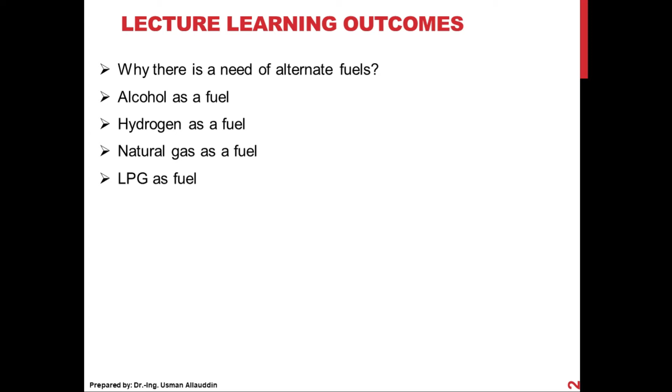In today's lecture, I am going to cover chapter number 7 of book Ganesan. The title of chapter number 7 is Alternate Fuels. These are the learning outcomes of today's lecture. So I will start the lecture with the question that why there is a need of alternate fuels. Then we will study the advantages and disadvantages of alcohol as an alternate fuel. Then we will study the same points, that is the advantages and disadvantages for hydrogen, natural gas and LPG as alternate fuels. So these are the learning outcomes of today's lecture.

So first we will discuss that why there is a need of alternate fuels. There could be several reasons. The first reason is that an enormous increase in number of vehicles have started dictating the demand for fuel. So you have experienced and you have observed that with the passage of time, with the increase of population, the number of automobiles which are based on the internal combustion engines have been increased tremendously.

So with that, there is a fear that gasoline and diesel will become scarce and most costly in the near future. So with this fear, people have started thinking for the alternate fuel. So they think that when the gasoline and diesel reservoirs will be finished, we should have some alternate fuels. So this is the number one motivation to go for the alternate fuels.

Then currently, because of the high cost of petroleum based products, some developing countries are trying to use alternate fuels for their vehicles, like Germany, USA, European countries, and the other countries. They have started using like alcohol or biofuels, electricity produced from the solar energy. So they are trying to use these alternate fuels.

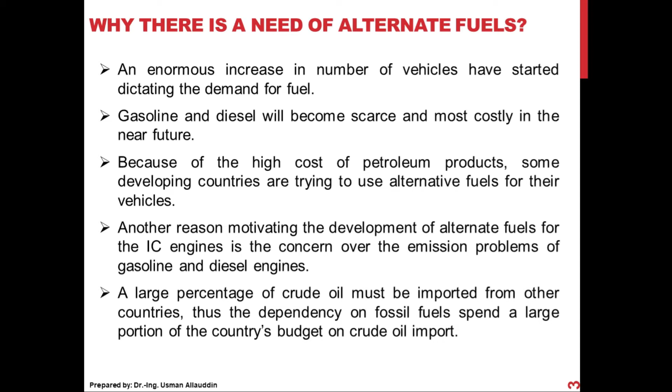Let's first discuss liquid alternate fuels. In the liquid alternate fuels, the famous option is the alcohol. So alcohols are an attractive alternate fuels because they can be obtained from both natural and manufactured sources. So alcohol based fuels can be obtained from natural resources like plants and the other living organisms, and then we can also manufacture them artificially in the labs by using chemical reactions. The most promising alcohols are methanol and ethanol, which are commonly used in many countries.

So let's discuss a few advantages of alcohol. These advantages are very simple to understand. So let's go through them one by one. So first advantage is that alcohol can be obtained through natural and manufactured resources. Alcohol has high octane number, like it has octane number greater than 100, while petrol has, I think, an octane number of around 90 plus, so this is a very big advantage,

so that with the octane number greater than 100 we can operate the alcohol based engine at compression ratios much higher than the gasoline based engine, and the engine performance at high compression ratio means higher efficiency, higher power output. Point number three, less overall emissions compared to gasoline based engines. So if you are using alcohol as a fuel, then the engine will emit less emissions.

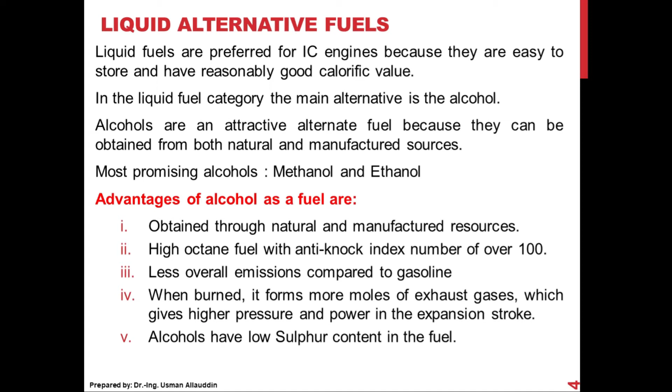When burned, it forms more moles of exhaust gases, which gives higher pressure and power in the expansion stroke. So it produces more number of moles of the exhaust gases, and if we have more exhaust gases, it means more pressure will be exerted on the piston, and that force will be transmitted to the crankshaft through the connecting rod, and the power output will be greater in the alcohol based engines. Alcohol has low sulfur content, so the sulfur based emissions will also be reduced when we use alcohol based engines.

Then there are some disadvantages of alcohol-based engines as well. Its first disadvantage is that alcohol has a low energy content, or in other words the calorific value of the fuel is almost half. So what does it mean? It means that if we want to get the same energy input to the engine as we get from gasoline, then we need to burn twice the quantity of alcohol as we are burning with gasoline.

So we need to increase the fuel tank size. The fuel tank size should be twice the fuel tank size of the gasoline-based engine. For example, if you are consuming 1 liter of gasoline, then you need to consume 2 liters of alcohol, because the calorific value of alcohol is half of the calorific value of gasoline.

Then disadvantage number two: combustion of alcohol produces more aldehydes. So if as much alcohol fuel was consumed as gasoline, then aldehyde emissions would be a serious exhaust pollution problem. So if we replace all the gasoline-based engines with alcohol-based engines, and we consume as much as the gasoline being consumed currently, then aldehyde emissions will become so much that it will cause a serious problem.

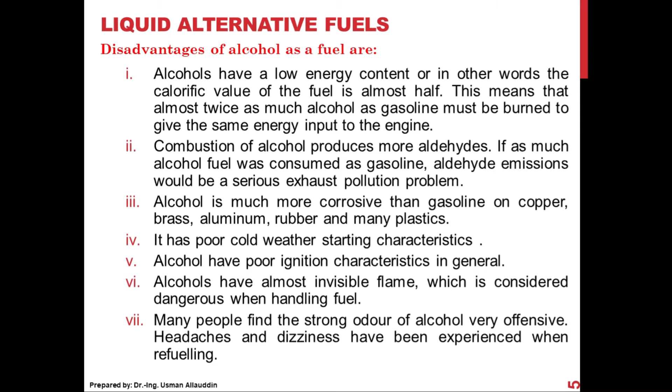Many people find the strong odor of alcohol very offensive. If you have experience, people find the gasoline or petrol odor very attractive, but alcohol has a very pungent odor, so people find it very offensive. And headache and dizziness have been experienced when refueling. So when you are refueling alcohol, its very offensive odor will cause headache problems.

Okay, now let's discuss hydrogen as an alternate fuel. The advantage of hydrogen as a fuel is that engine emissions will be reduced considerably. Good fuel availability: hydrogen is abundantly available because there are many methods to produce hydrogen. You have also studied in chemistry that there are chemical reactions where hydrogen is produced as a byproduct. So hydrogen is abundantly available, and its availability is not an issue.

Suppose it leaks from the fuel tank or from the engine; its leakage will not cause any problem to the environment, because we also have hydrogen gas in the environment. So if it goes into the environment, it will not cause pollution. High energy content per volume when stored as a liquid: when it is stored as a liquid, its energy content will be higher compared to gasoline. Now let's discuss some disadvantages of hydrogen as a fuel.

Requirement of heavy and bulky fuel storage. As I discussed in the last lecture, hydrogen is a gaseous fuel and gases occupy a large volume. So when you want to store hydrogen as a fuel in your vehicle, you need a very big, bulky and heavy cylinder. It will increase the overall weight of the vehicle, and in order to carry the additional weight of the heavy bulky storage tank, you need to spend extra engine power to cover that weight.

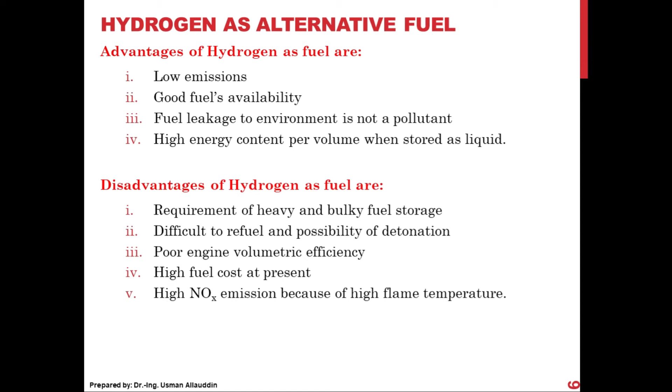High fuel cost at present, because right now hydrogen fuel is not produced commercially. So that is why hydrogen cost is relatively higher. Secondly, because in hydrogen there is a high energy content per volume, its flame temperature will be higher, and when the flame temperature is higher, NOx emissions will be increased, because the NOx emissions are dependent on the flame temperature. Higher the flame temperature, higher will be the NOx emission. So when you are using hydrogen, overall emissions will be low, but NOx emissions will be higher.

Now let's discuss natural gas as an alternate fuel. What is natural gas? Natural gas is a mixture of methane. We normally have 60 to 95% methane in the natural gas, and there are small amounts of other hydrocarbon fuels. So normally natural gas is also called methane gas. An advantage of natural gas is that its octane number is 110, which is good for SI engines. That is, its resistance to knocking is higher than gasoline, and we can operate the CNG based engine at much higher values of compression ratio.

That is why you have seen that in Pakistan, many owners of cars, buses, trucks, they are using CNG as a fuel, and when you talk to them, they say that when they run their engine on CNG, its performance is better. So now you can technically answer that, because the octane number of CNG is 110, and it is much greater than the octane number of gasoline or petrol. So that is the reason that when you are using CNG as a fuel, you can operate your engine at a much higher compression ratio, and higher compression ratio means higher efficiency and higher power output.

Low engine emissions: methane is considered the cleanest fuel, and when you burn methane as a fuel, engine emissions are the lowest. Fuel is fairly abundant worldwide. It can also be made from coal, but the process of making it is costly. So these are some advantages of natural gas.

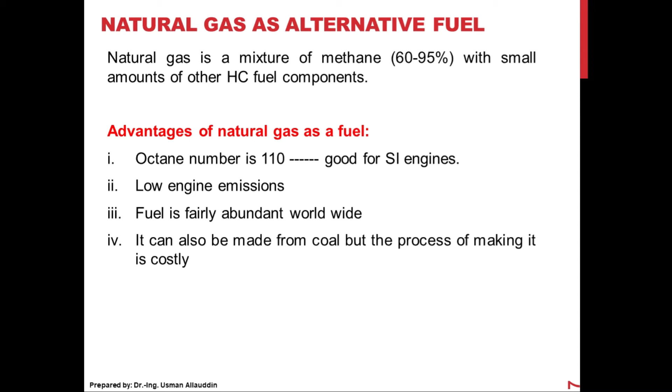Now let's discuss some disadvantages of natural gas. As I discussed with hydrogen, when you are using natural gas as a fuel, we need to have a large pressurized storage tank. Those who have used CNG based cars, they have a white color cylinder at the back in the dickey. These are the specialized high pressure storage tanks where the compressed natural gas is stored. Refueling of CNG is a slow process, and low energy density results in low engine performance. Because it's a gaseous fuel, that is why its energy density is low.

Low engine volumetric efficiency, because it is a gaseous fuel. Again, I have told you that when you are using a gaseous fuel, it is very difficult to take in oxygen, because the gaseous fuel will occupy space and less oxygen will go into the cylinder as compared to liquid fuels. So its volumetric efficiency will be low. So in order to avoid the storage and handling problem, natural gas is stored at a high pressure. Then it is called compressed natural gas, and compressed natural gas is stored at 16 to 25 bar pressure.

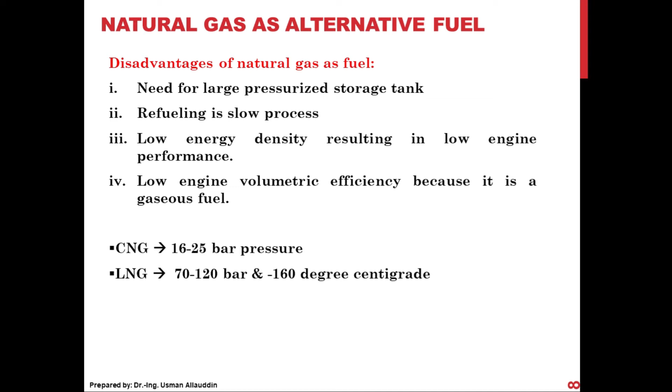And when you compress at much higher pressure, like 70 to 120 bar, natural gas will be liquefied, and during the phase change process its temperature becomes around minus 160 degrees Celsius. So CNG is at 16 to 25 bar, and LNG, liquefied natural gas, is at around 70 to 120 bar.

The natural gas, as I have told you, can be compressed, and then it is called compressed natural gas. The CNG fuel feed system is similar to the LPG fuel feed system. CNG conversion kits are used to convert petrol driven cars into CNG driven cars. So it's a common observation that when you want to run the petrol based engine on CNG, you actually need a special kit, and that special kit contains auxiliary parts like the converter, mixer, and the other essential parts required for the conversion.

Like I have told you, CNG is compressed natural gas, and compressed natural gas is stored at 16 to 25 bar in order to avoid the storage problem. But when you provide the natural gas to the engine, you release that pressure. So there is a part called converter. Converter is a part through which, when the CNG passes, it reduces its pressure. So when pressure is reduced, the compressed natural gas comes back into the gaseous form, and then it goes to the mixer where it is mixed with air, and the air fuel mixture is prepared, and then this air fuel mixture is supplied to the combustion chamber, and the combustion takes place.

This table shows the emission levels and a comparison between CNG driven vehicles and the petrol driven vehicles, and you can see that these are the petrol based engine. So when you use the petrol, the carbon monoxide emission is 0.92 gram per kilometer, whereas when you use the CNG, this value drops to 0.05 gram per kilometer, which is considerably low.

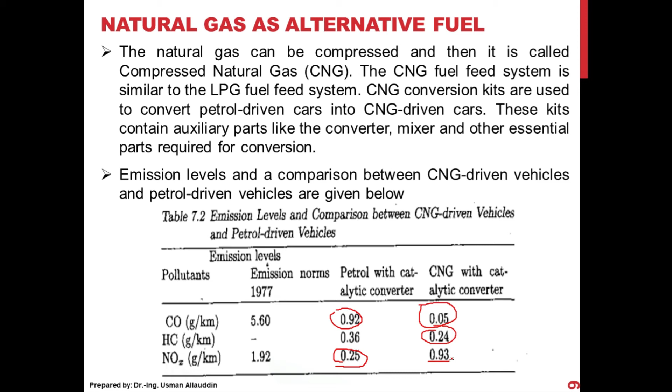So now let's discuss LPG, liquefied petroleum gas. What is petroleum gas? Petroleum gas is actually propane. Propane and butane are also called petroleum gas, or sometimes a mixture of propane and butane is called petroleum gas. And it is stored at high pressure. So in order to avoid the storage and handling problem, petroleum gas is stored at much higher pressure, so you compress it, so it comes into the liquid phase, and that liquid is stored in the fuel tanks, which are sealed.

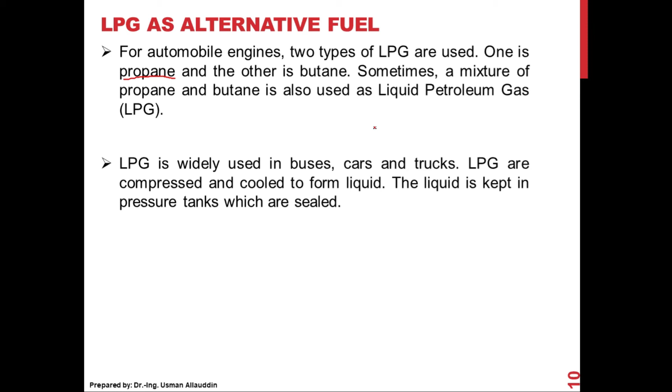So what is crankcase dilution? I have discussed in the previous lecture that when we use the liquid fuel, and if the liquid fuel volatility is low, then the liquid fuel droplets will go into the engine, and they will remove the layer of lubrication oil from the engine parts, and they will dilute the engine parts, so their deterioration will start, their life will be reduced.

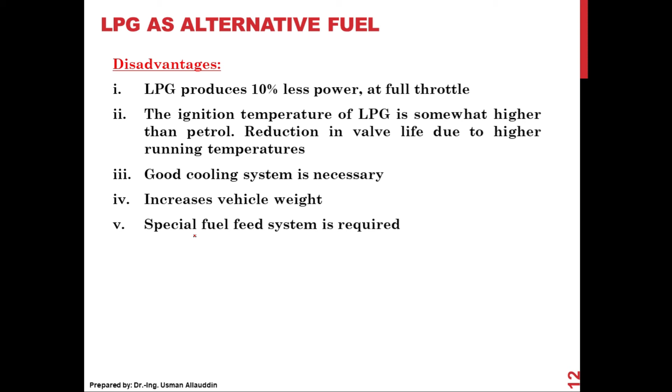Special fuel feed system is required. That, I already told you. So these are some comparisons in table form, most of which I have already discussed. Petrol has odor, LPG is odorless. Petrol has a unique smell, but LPG has no smell.

Its octane rating is 81. Octane rating of LPG is 110. Petrol engine is not as smooth as LPG because its octane number is low, and due to high octane number, the combustion of LPG is smoother, knocking is eliminated, and the engine runs smoothly. And this you can confirm from the drivers who are using CNG or LPG as a fuel. They will tell you that the engine performance is much smoother.

The engine pickup is very good when they are using CNG or LPG as a fuel. It is all because LPG and CNG have much higher octane number as compared to petrol. In order to increase the octane number, petrol requires lead additive. Since petrol has low octane number, it requires lead additives, but LPG does not require any lead additives.

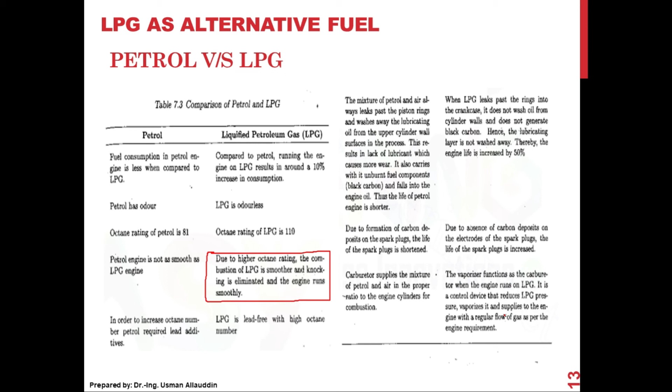Carburetor supplies the mixture of petrol and air to SI engines, whereas in an LPG based engine we have a special kit which has a converter, mixer and other essential parts. So this diagram shows the LPG based fuel feed system. We have the LPG storage tank at the rear side. This is the front view, a white color cylinder, and then we have a fuel line through which high pressure petroleum gas will flow, and it will come here.

And then we have the converter. The converter will release the pressure, and it will bring the liquefied petroleum gas to the gaseous phase. When liquid is converted into vapor phase, we need the latent heat of vaporization. This latent heat of vaporization is absorbed from the surrounding air and the engine, and sometimes the engine reaches freezing temperature. So in order to avoid this phenomenon, we circulate the cooling water.

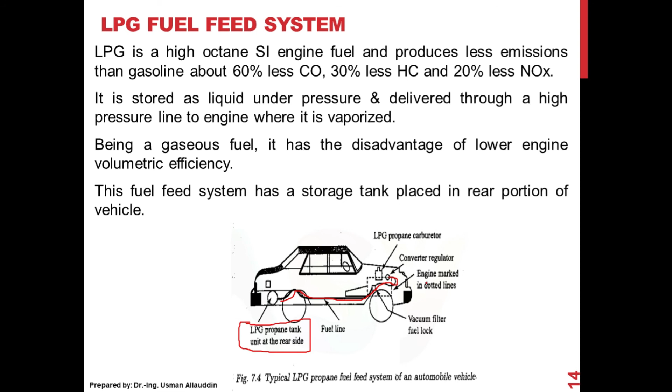So when the converter drops the pressure, the LPG is converted into gaseous phase from the liquid phase, and the heat is absorbed from the surrounding water, the water gets cooled, and then this water is again heated up in the heater. We also have a vacuum filter, so that if there is any dust particle in the fuel, we can stop it in the filter, and then it is supplied to the converter. And then we have the LPG propane carburetor. So in this way the LPG based vehicle works.

Sometimes we ask in the question: illustrate the typical LPG propane fuel feed system. So students, please note that when we ask you to illustrate the typical LPG propane fuel feed system, you only need to draw this diagram, because illustrate means you need to explain with the help of a diagram. There is no need to write this explanation. But when we write, please explain the typical LPG propane fuel feed system of an automobile vehicle, then you need to write this theoretical explanation.

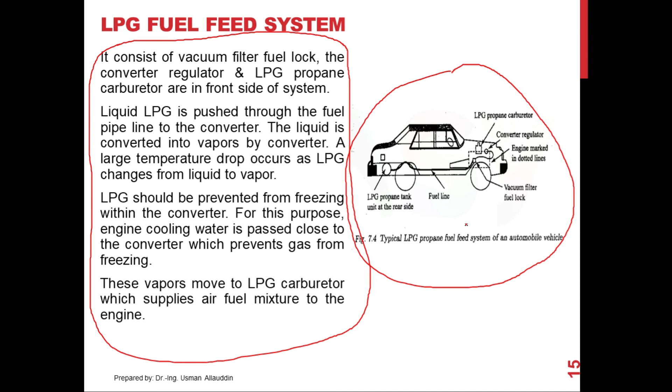And you also need to look at the number of marks of a question. If it is a 3 or 2 mark question, then you need to write it very briefly, concisely. But if it is 8 marks or 10 marks, then you need to write it in detail, and you need to draw the diagram as well.

Okay, so it was a brief lecture on alternate fuels. We have discussed the possibility of using alcohol, hydrogen, compressed natural gas, and LPG as alternate fuels. We have discussed their several advantages and disadvantages.